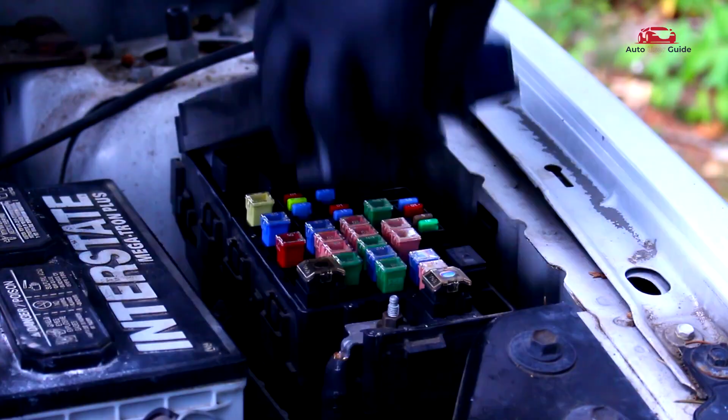Are you having trouble locating the fuse box on your 2023 Mercedes S-Class? Wondering which fuse controls what in your car? In this video, we'll break down everything you need to know about the fuse box, its location, fuse diagram, and how to troubleshoot common issues. Stay tuned and let's get started.

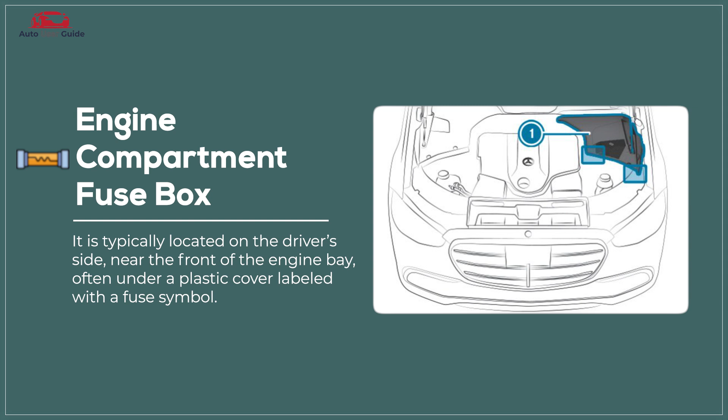Engine compartment fuse box. The engine compartment fuse box in the 2023 Mercedes S-Class protects and controls power distribution to critical engine, cooling, and safety systems.

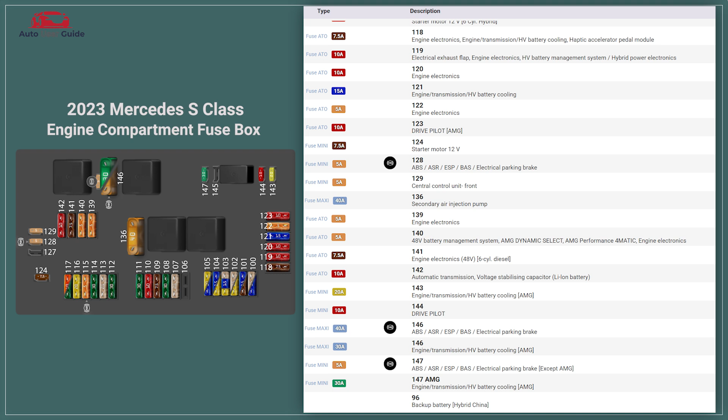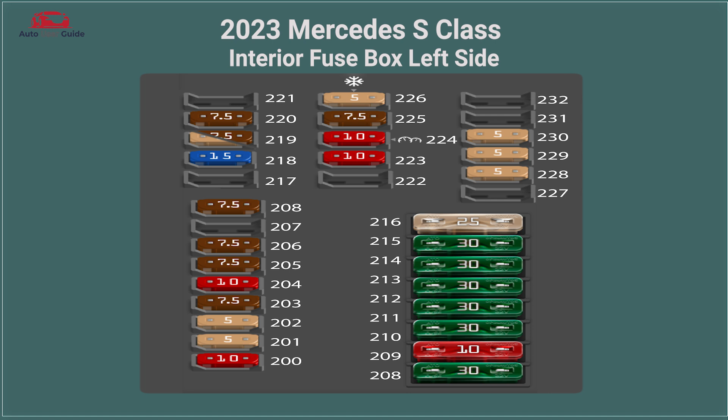Interior fuse box, left side. The interior fuse box left side in the 2023 Mercedes S-Class protects the electrical circuits for interior features like lighting, infotainment, climate control, and power accessories.

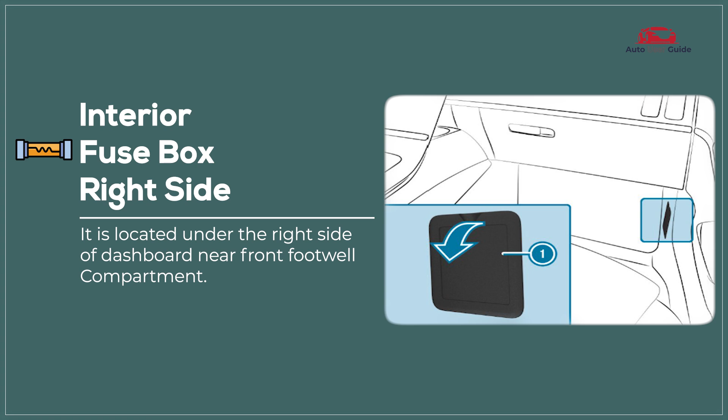Interior fuse box, right side. The interior fuse box right side in the 2023 Mercedes-Benz S-Class distributes and protects electrical circuits for passenger side amenities, such as rear cabin lighting, seat adjustments, window mechanisms, and USB power outlets.

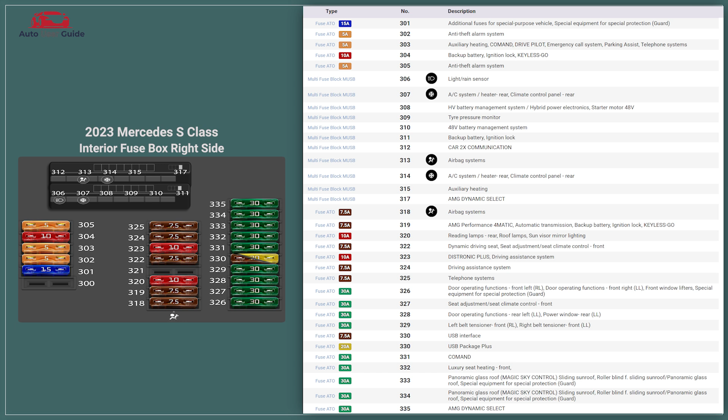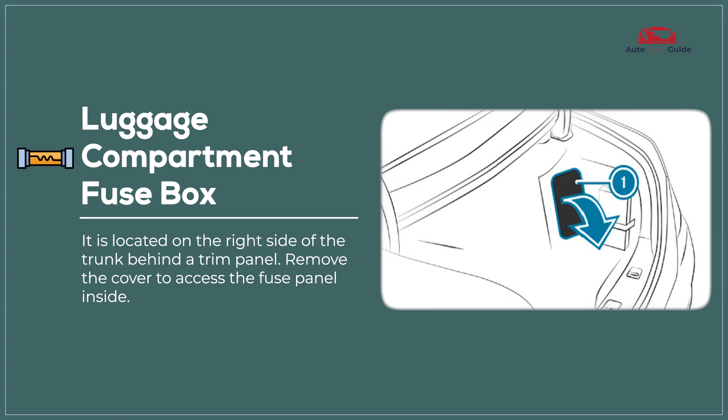Luggage compartment fuse box. The luggage compartment fuse box in the 2023 Mercedes-Benz S-Class safeguards and distributes power to rear area systems like trunk lighting, USB sockets, and optional entertainment or sensor modules.

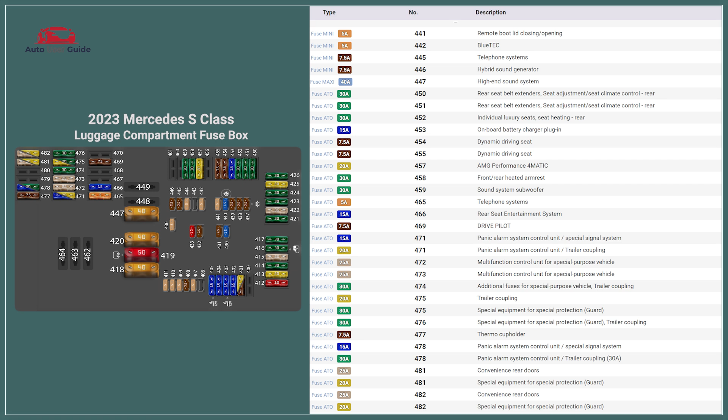The additional fuse box in the luggage compartment of the 2023 Mercedes-Benz S-Class supplements the primary luggage fuse box by protecting and managing power circuits for optional components.

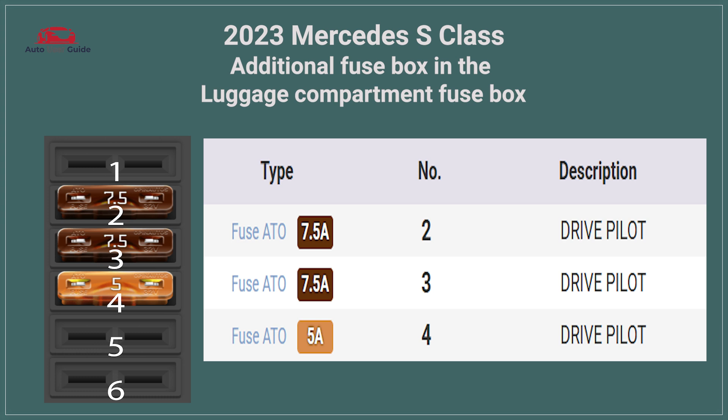Types of fuses: blade fuse, standard blade fuse, mini blade fuse, maxi blade fuse, micro 2 fuse, micro 3 fuse, J-case fuse.

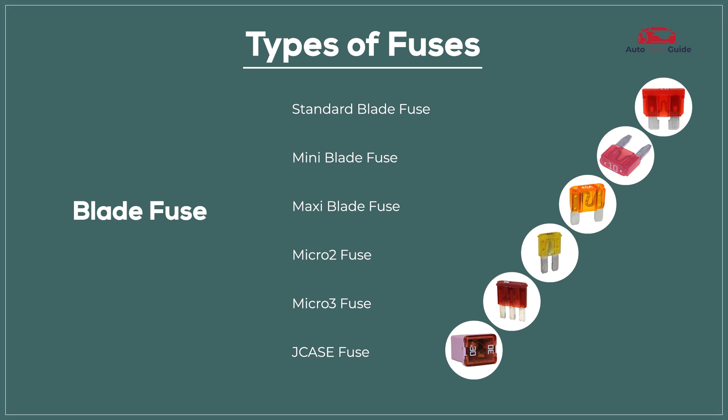Glass tube fuse, AGC fuse, SFE fuse.

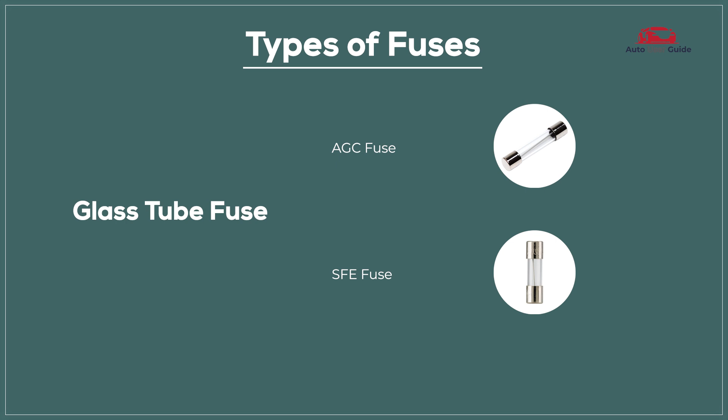Ceramic fuse, Bosch fuse, DIN fuse.

PAL fuse, low-profile PAL fuse, standard PAL fuse.

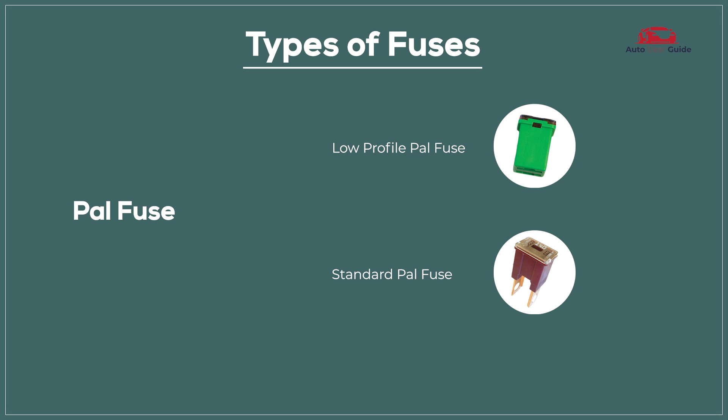Link fuse, mega fuse, high amperage link fuse.

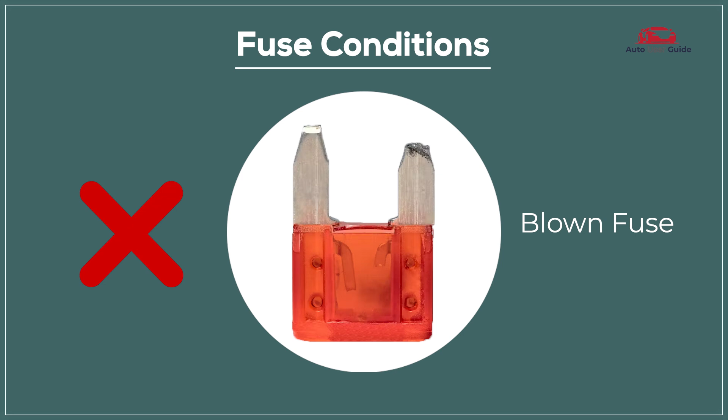Fuse conditions: a blown fuse means it's no longer functioning and needs replacement, while a perfect fuse is in good working condition and performing as expected.

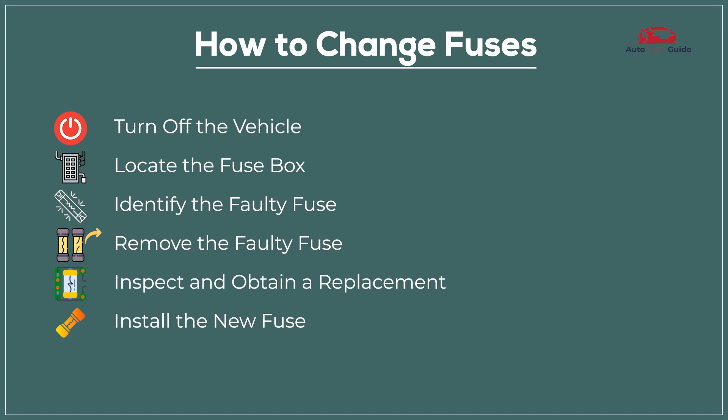How to change fuses: turn off the vehicle, locate the fuse box, identify the faulty fuse, remove the faulty fuse, inspect and obtain a replacement, install the new fuse, and test the replacement.

Safety precautions: disconnect the battery, wear protective gear, use proper tools, check for correct amperage, and avoid water exposure.